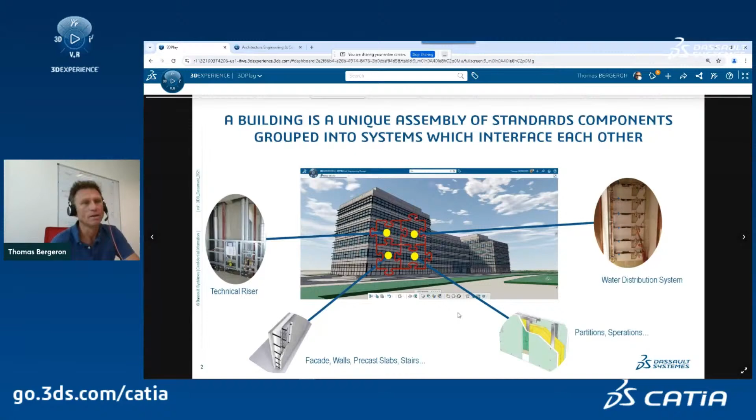If we are able to capture the engineering and the construction know-how on how to fabricate these pieces into a smart component, a brick, then the reuse will be very easy from project to project, okay? So with productization, we target the construction site, okay? In order to capture the construction methods for each brick, we want to capture the knowledge and know-how of each brick, how it is fabricated.

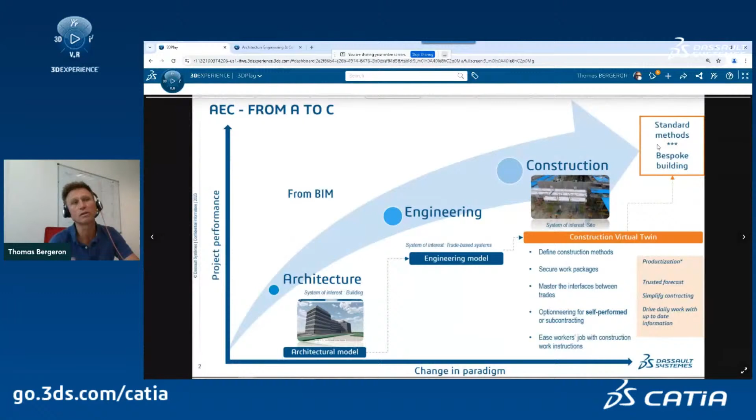We want to master the interfaces on the construction site and to ease the worker's job on the construction site, okay? So productization is about how to standardize the methods of creating all these bricks. So the goal here, if I just play this little video, is to bring to the construction site all the knowledgeable information to fabricate the building. So all these bricks will provide knowledgeable information such as bill of material, quantities, resources needed for each phase of the construction site. So each brick needs to be very detailed, because this is the detailing that will help us to solve all the issues, all the interfaces between these bricks.

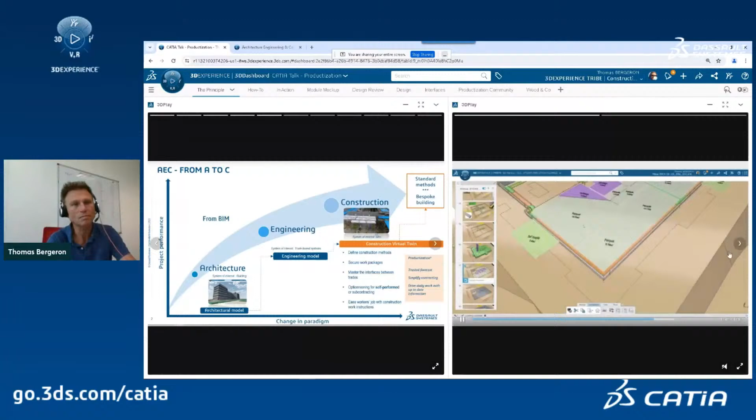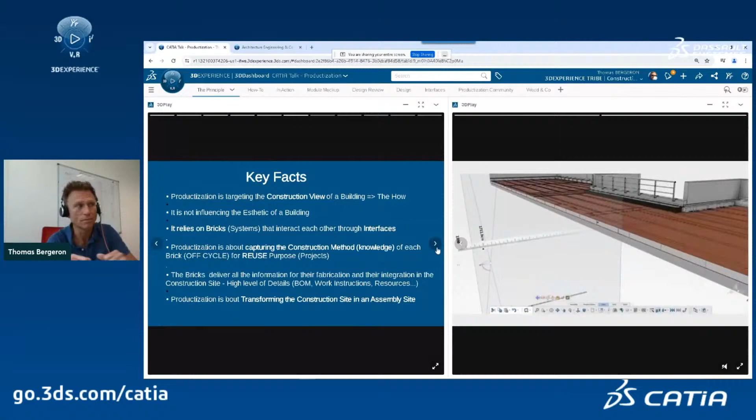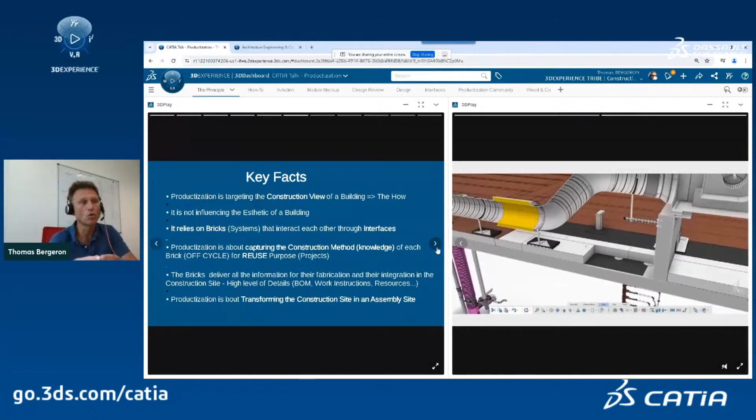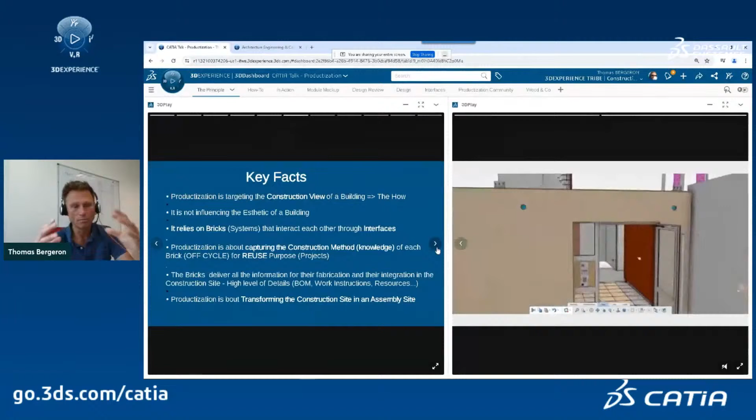So just to quickly summarize these key facts. Productization is targeting the construction view of a building, the how. It is not influencing the aesthetic of a building. It relies on bricks that interact with each other through interfaces. Productization is about capturing the construction methods of each brick. So each brick will be fabricated off-site. We will capture all the knowledge, engineering knowledge, construction site know-how, put that in a brick, and then we'll reuse it from project to project.

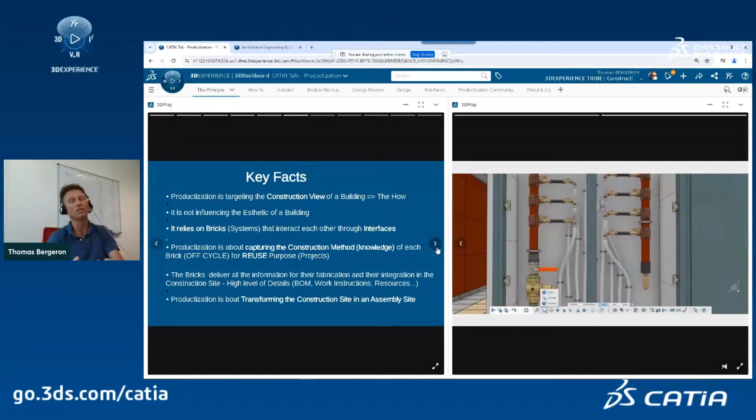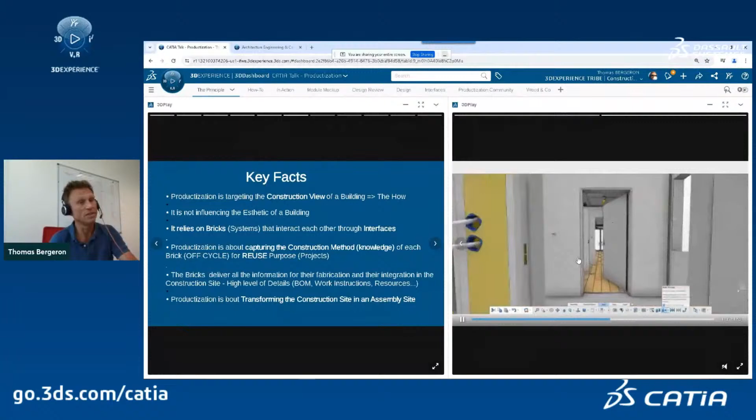So the bricks will deliver all the information for their fabrication, installation and integration on the construction site. That's why these bricks have a very high level of detail. Okay, so they will provide deliverables such as BOM, work instructions, resources. And this is what you see here on this video. This is the level of detail that these bricks will provide to the construction site manager, because all the needed information is in the details.

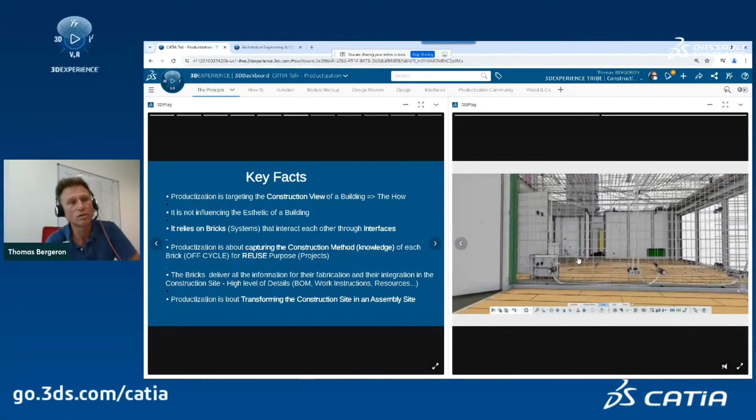How you will integrate and facilitate the interfaces between an electrical plug here inside a concrete wall. These are all the detailed interfaces that we need to solve before the construction site. And that's why the bricks need to be very detailed, in order to manage all these interfaces. Okay.

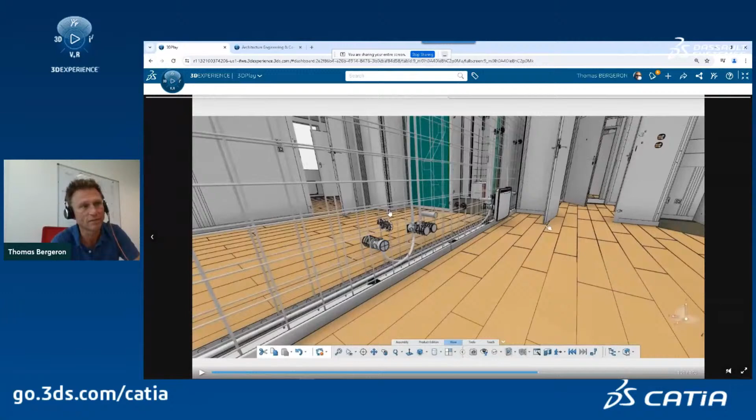So let's continue. So how does it work? Basically, we have an off cycle team that will produce these bricks, which contain the complete know-how. And then once we have a project, this brick will be instantiated inside the project in the construction virtual twin. Because these bricks are adaptive, generative, and parametric, they will automatically adapt to the context of the project. We will solve the interfaces of the brick, and then it will deliver the right information for the construction site manager, such as the BOM, the parts list, the work instructions, in order to facilitate the worker's job. Okay.

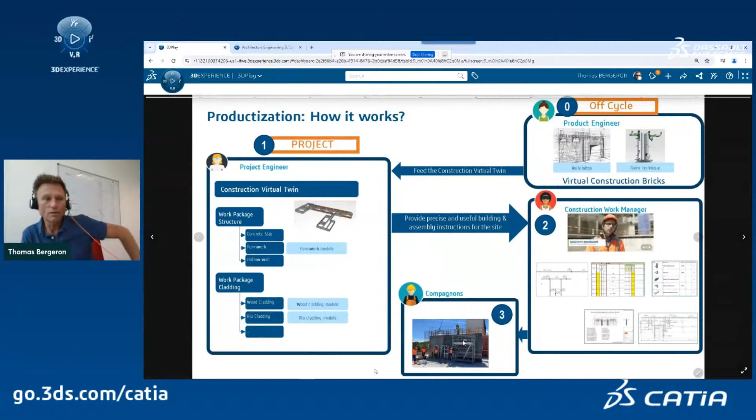So what's inside a brick? A brick has some inputs. The first input will be the geometrical context: where we're going to use this brick, in which context. Then it will have to connect to external interfaces to adapt itself to its environment, and also some technical specifications, because a brick is parametric. You might change the configuration of the brick. It needs to be adaptive to adapt to its context, and sometimes generative when the topology of the context changes from one project to another. So the bricks might need to be generative in order to create new parts on the fly.

And inside this brick, there is a lot of know-how. The field know-how means all the fabrication best practices, the material and human resources needed to install these bricks, and also all the engineering rules, legislation, regulations, standards, and stuff like that. And because a brick is very detailed, it also has to collect all the commercial products from the catalogs and import this data into the bricks, because a brick is mainly composed of standard components.

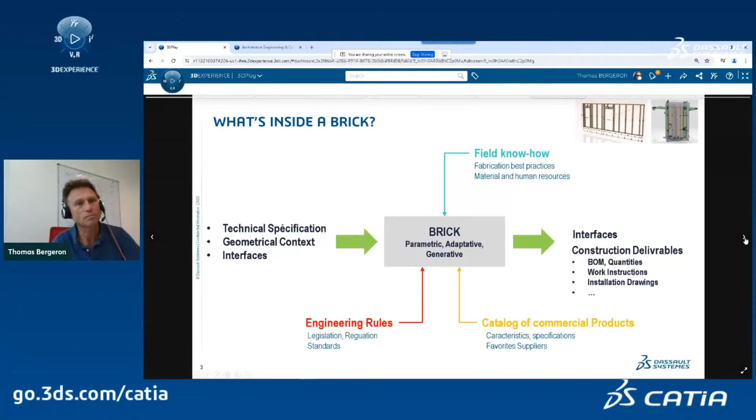So if we take an example of a wood facade, this is an exercise that I've done with one of our pioneers, Wood & Co. So we created a wood facade brick. The wood facade brick here is using a wall coming from a Revit or an IFC file. So here we have a generic wall, okay? This is just a solid, dumb solid.

And what the brick will do, inside the brick, we have a generative skeleton. It will automatically analyze the shape of the input of the wall, automatically detect all the interfaces for windows or doors, automatically, based on field know-how and engineering rules, compute the position of all the standard parts inside the brick, position the standard parts accordingly, and transform, it means cut, drill, or make other operations on the standard parts to create the final results.

So this brick is capturing, of course, the transformable parts, such as the pieces of wood that have specific standards for the sections, but they are transformable because inside the brick, we're going to automatically cut them or drill them at the right size. And also, we're going to use not transformable standard parts that will be just inserted in the brick and positioned automatically at the right location.

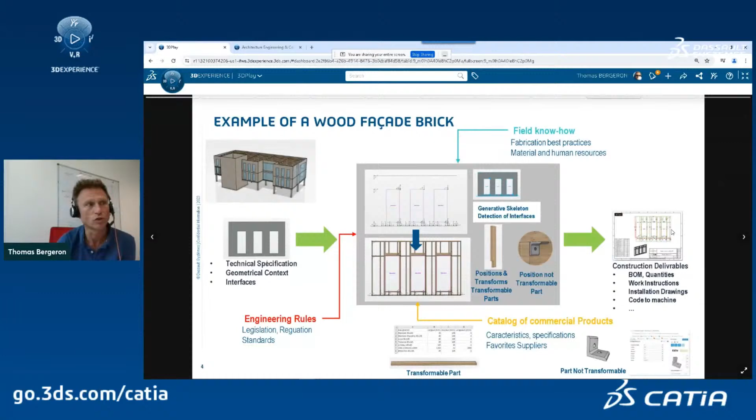And the brick will deliver a BOM, cut list, an installation drawing, and some work instructions. So this is an example of the brick. So let's see that now in action. So here we have a context. Here we have imported into the platform an IFC file. And what we have isolated, okay, all the facade walls. But these facade walls need to be performed as a wood facade.

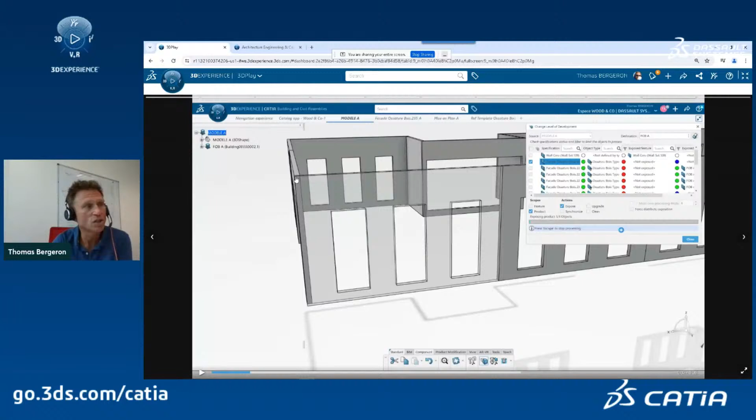And what we are doing here, we have attached the construction method, it means the wood facade, to each piece of facade coming from the IFC. So here, the facade that you see in transparent, we have attached the wood facade brick. And we are automatically instantiating this brick. And let's see the different actions that happen during the instantiation. First of all, the system imports the brick into the context. So you see here, the brick is not positioned.

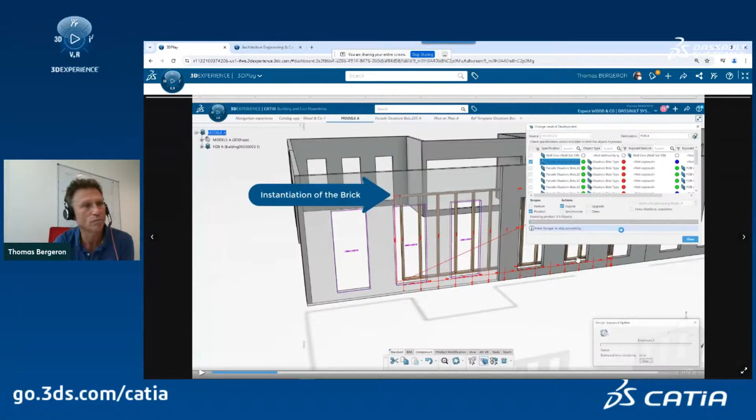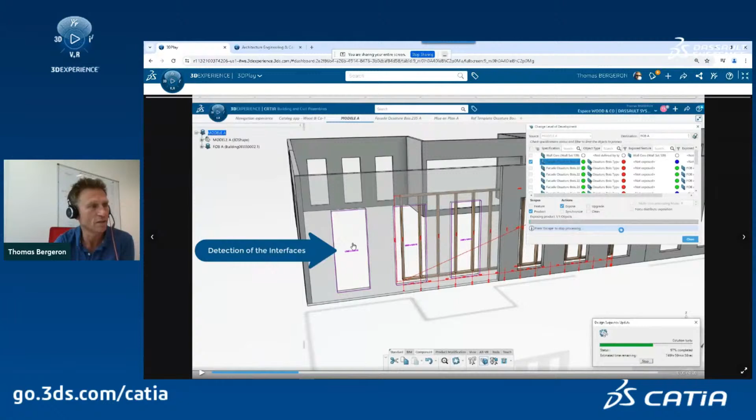Then you see automatically the brick has detected the interfaces of the wall on which we want to create this stud facade. You see the purple curves here, contour. It has detected the windows automatically with the size. Based on that, the brick is analyzing the wall. It has computed the position of each of the members and instantiated each member and cut it at the right dimension. But it has not yet solved the interface with the windows.

And here you see it has started to provide the right solution for a specific opening. For a window, we have some specific trim to instantiate. And the brick is doing that automatically in a generative way. For each window, it will instantiate the right solution. The brick detects the interface. And because we put some knowledge, it knows how to solve this interface.

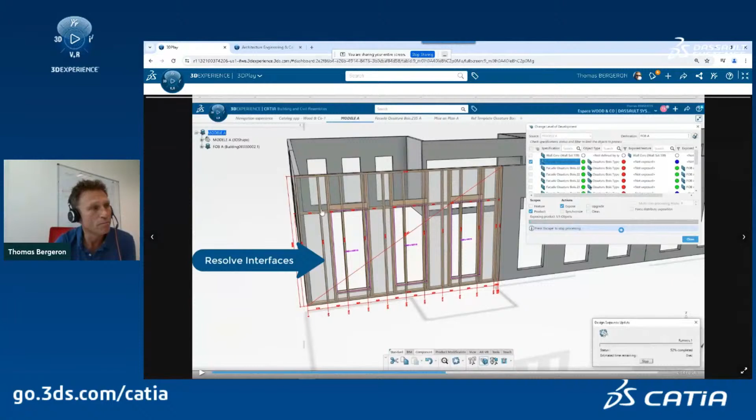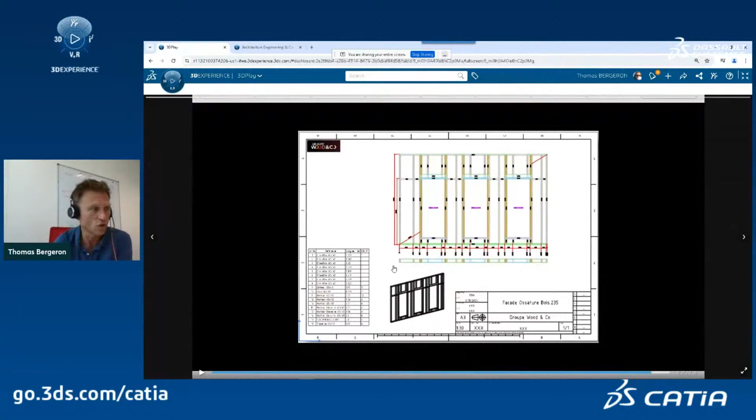So now it has solved the interface, and now the brick will transform all the pieces to create the final result. And you see here we have some studs in the middle of the openings. Of course, we don't want that. So this is where the brick will finally transform and generate the deliverables. And you see automatically it will provide the right result, at the same time with all the quotation and the fabrication drawing here with the parts list and so on. So this is just an illustration of the instantiation of a system inside a building.

So productization reduces significantly the engineering work on a new project. We have captured the engineering work one time, and then we can just reuse it project to project. It minimizes the interfaces at the construction site. Because the bricks have already solved the interfaces inside them, we just have few interfaces at the construction site.

When the brick is delivered at the construction site, it can be delivered in different ways, as kits of parts, pre-assembled, prefabricated. And in fact, what we see is the construction site becomes an assembly site where the kits of parts or the prefabricated modules arrive, and we're going to assemble them together. So this is an assembly job. It's no more a traditional construction job. So it facilitates significantly the worker's job on site. So it reduces a lot the construction phase and then reduces significantly the cost of a project.

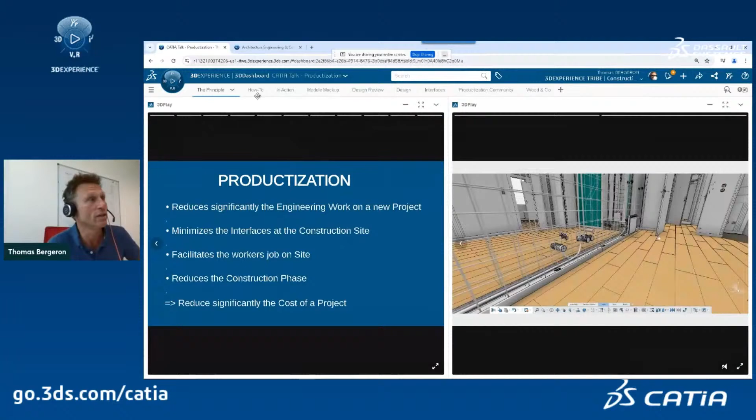So now let's go a little bit more into the technical, in the how-to. So we have seen that inside a brick, we might have a generative skeleton. So what do we use to create this generative skeleton? So here we have, for the wood facade, you see, we have the input. And in fact, we create a design sequence. So this is X generative design or visual scripting.

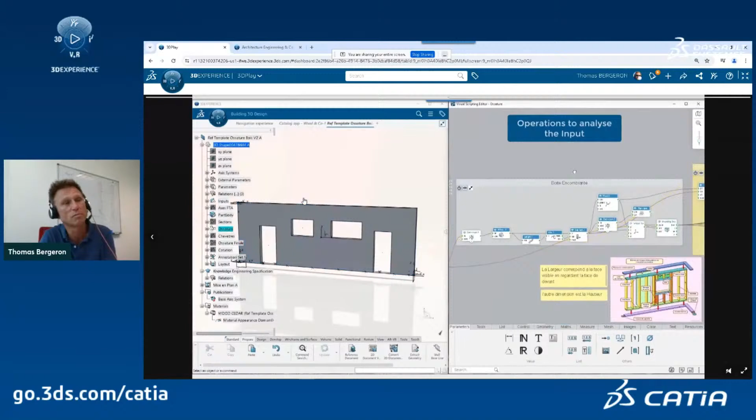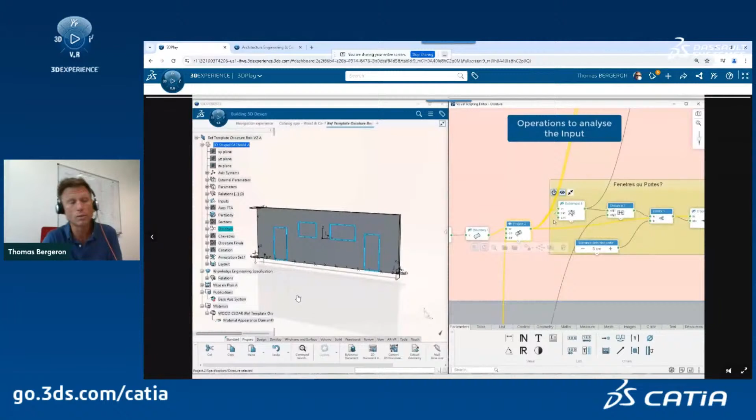This is the solution that we have in the 3D experience platform to automatically recognize the complete topology of an input. So here we have the wall. Automatically, we're able to identify its position, its orientation, to identify the different openings. And then it's very easy to differentiate here the openings, the doors from the windows, because the interfaces might be different. The solution that we want to instantiate on a door or on a window might be different. So this is why we are differentiating the window with the doors to provide the different solution.

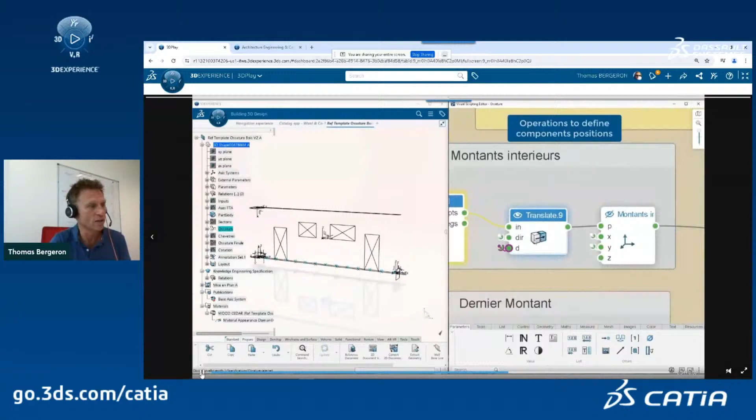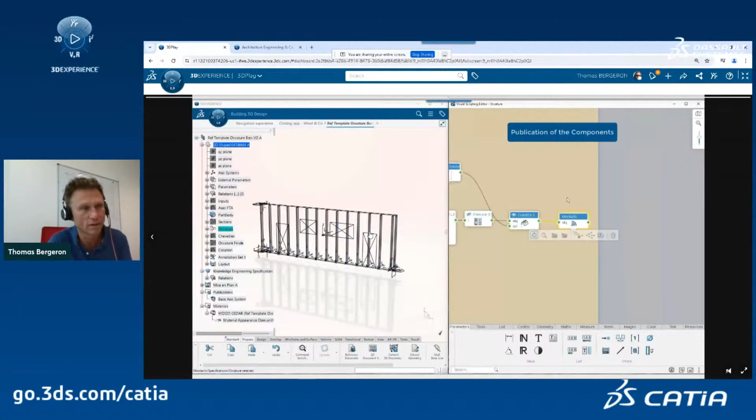In this generative skeleton also, we compute automatically the position of all the different standard parts. And so after, it's very easy to import the part and put it in position. So all this is done in a generative manner. It means whatever the wall, the input is, the topology and the input, we will recompute everything automatically. This is the power of the 3D experience platform. So this is a generative skeleton.

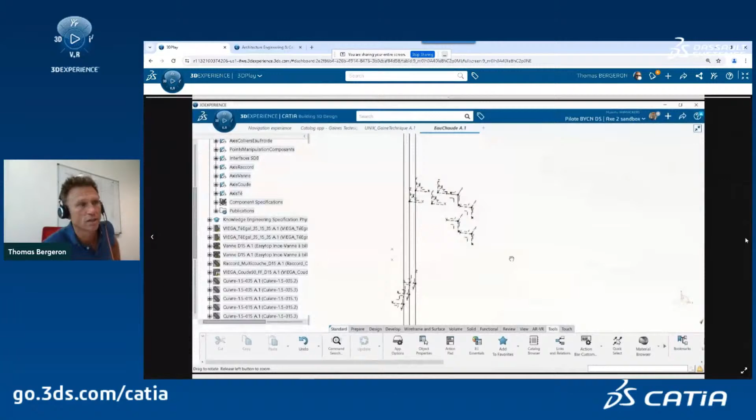We might also use a more standard approach with a parametric skeleton. So a parametric skeleton is just using points, lines, and axis systems to define, in fact, the position of the standard parts of a brick. We would use a parametric skeleton where the input and the context of the brick is very constant from a project to another one, where just dimensions change, but not the topology.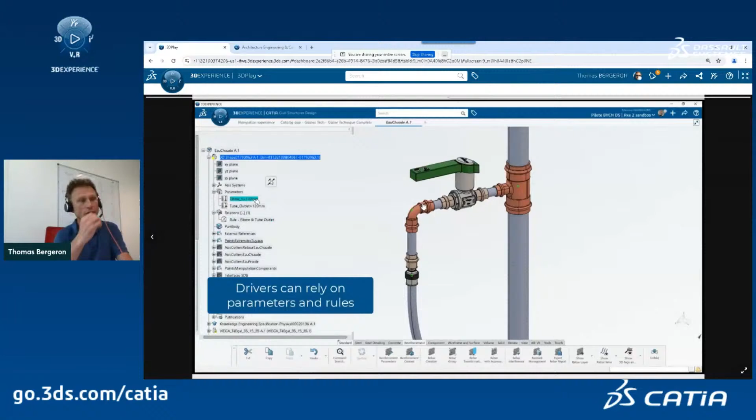So here we see that we create a parametric brick. Everything is associative. It's very detailed, of course. We have all the components, and of course, we can embed know-how rules into the brick to provide a specific behavior based on engineering standards and stuff like that. Okay. Here we go.

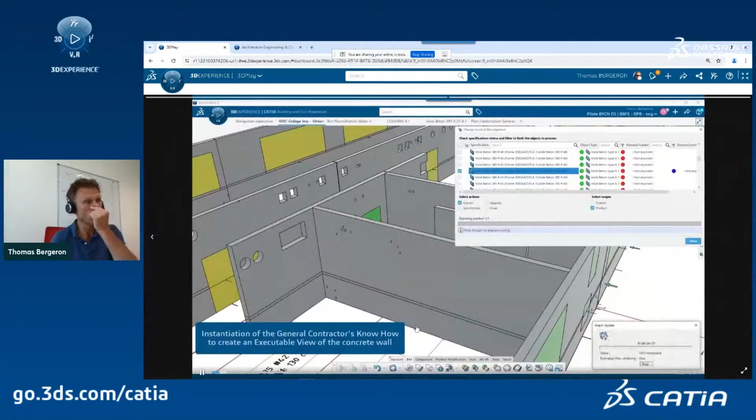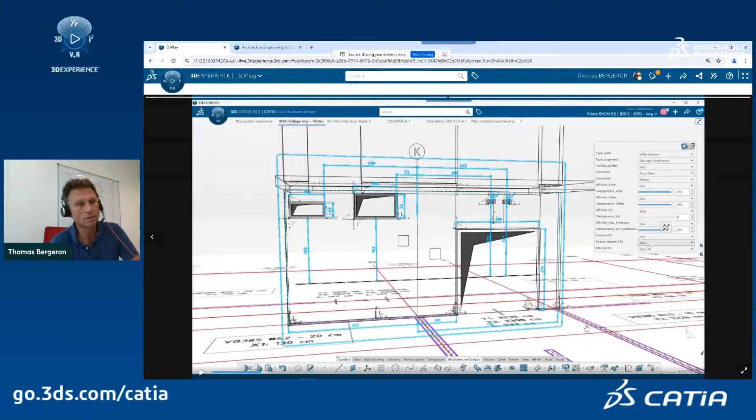Another solution, this is the generative part placement. Generative part placement, this is very powerful. So this is a concrete wall brick that we are using on an IFC file. So automatically it detects all the openings of the wall. The brick will dimension automatically all the openings to create the formwork drawing automatically.

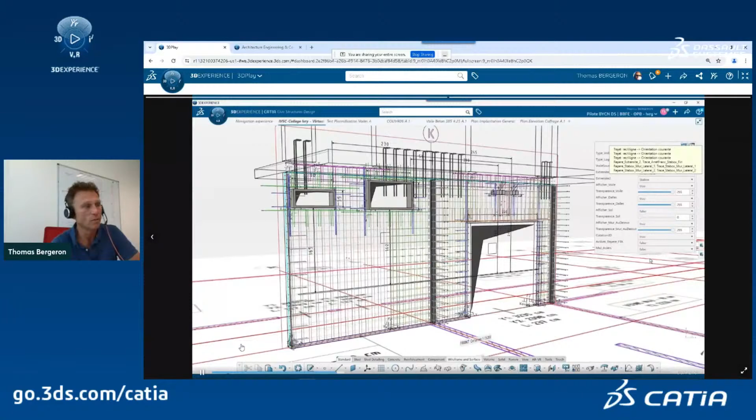And at the same time, because in the brick we have captured a lot of knowledge, we are able automatically to position standard modules of rebars at the right position, location, and dimension. And this in a generative manner. So this is extremely powerful because here with one single brick, you can in fact create the rebars of hundreds of walls.

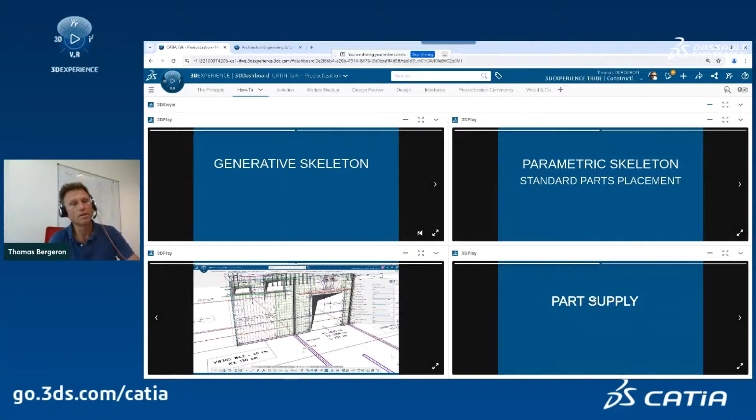Okay. The other topic that I would like to discuss and to present you is part supply. This is the capability when you fabricate a brick to be able to directly access a supplier catalog to select very specific parts from the supplier catalog and insert this part directly into your design. So here, we're gonna select a connection angle with 2 holes.

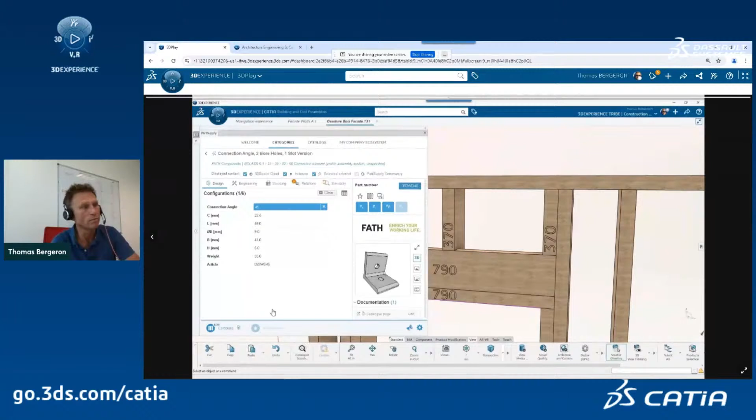So directly from part supply, we are able to change the configuration, to select a standard configuration that we want, to review the technical specification of this connection and import it directly in our session. So automatically the part is converted, inserted into our design. And if we re-import it a second time, we will use the same reference.

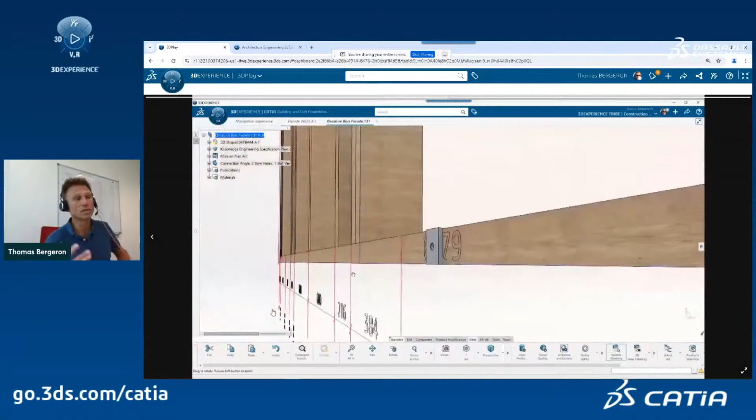So then we can, of course, quickly reuse this part into the design, position it exactly where we want. And so it facilitates significantly, in fact, the work of the designer to be able to directly access the supplier components. Okay.

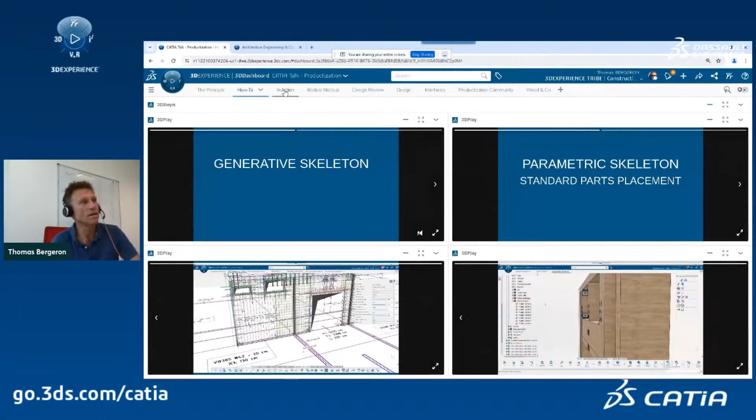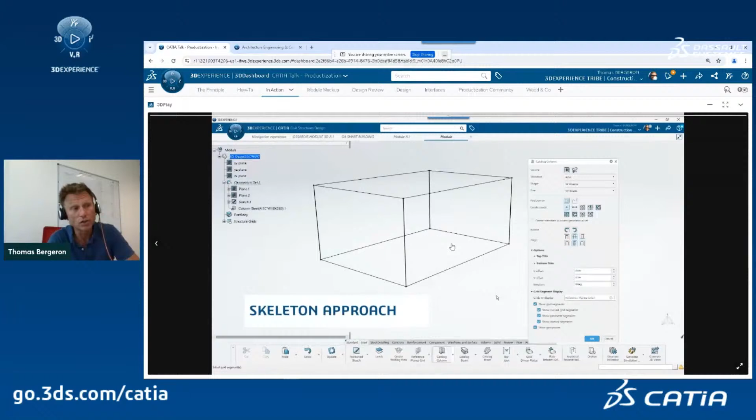So let's see productization in action. So you have seen some of it, and now I'm going to review and comment a video that I posted recently on the different media. It's about creating a building module using productization. So actually, the goal here was to illustrate to our customer the productization approach.

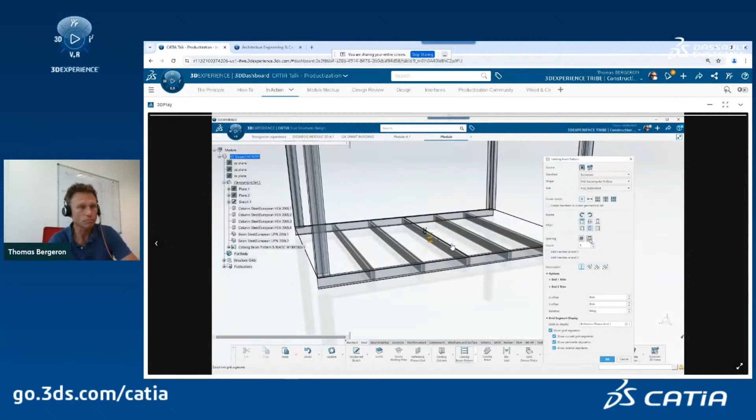So here what we have is a module. And here we have created a skeleton, a parametric skeleton to define, in fact, the bounding box of the module. And right on this module here, I am building some steel connections to create the steel structure of the module.

But what's interesting, it's a little bit after, it's the way we're going to use, in fact, several bricks to fabricate this module. What's interesting in this video is the bricks that I've used. None of them were dedicated to this project. It's just reuse of bricks in a totally new environment.

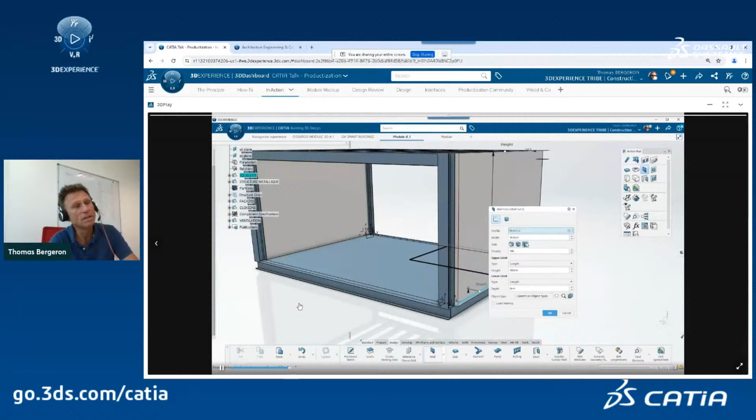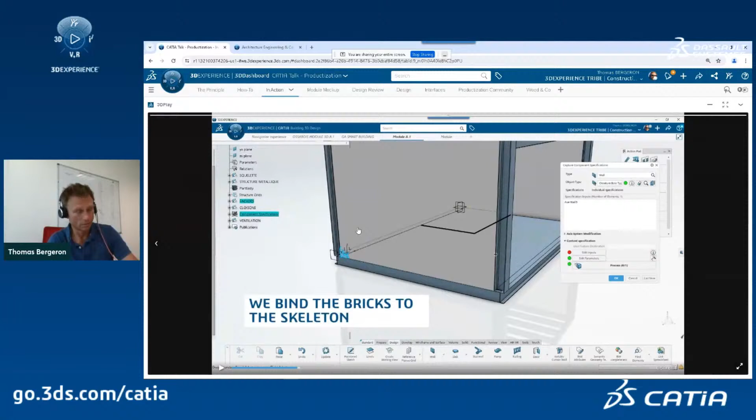So here what I'm doing, I am illustrating the architect's view, creating some very basic wall, okay? But on this basic wall, I attached a specification. This is an object type. And what it means, in fact, to this basic wall from the architect definition, we are attaching a construction method. It means a brick. This basic wall will be a wood facade. So just by attaching a specification, a construction method to this wall, I will be able to create automatically my wood facade.

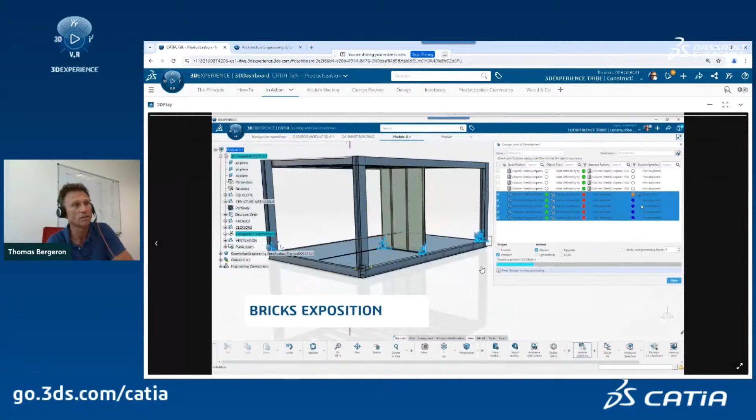So we're doing that with these two walls. At the same time, we are attaching other specifications for the partition. So here you see the small icon. So here we have defined also, say, on this line, I want a partition, and a partition. And automatically the system will search in the brick catalog and instantiate the bricks. Automatically, they will adapt to their context. So you see they are imported and automatically their sizes adapt to the right context, to the right position with the right engineering rules. So it's very fast, very powerful.

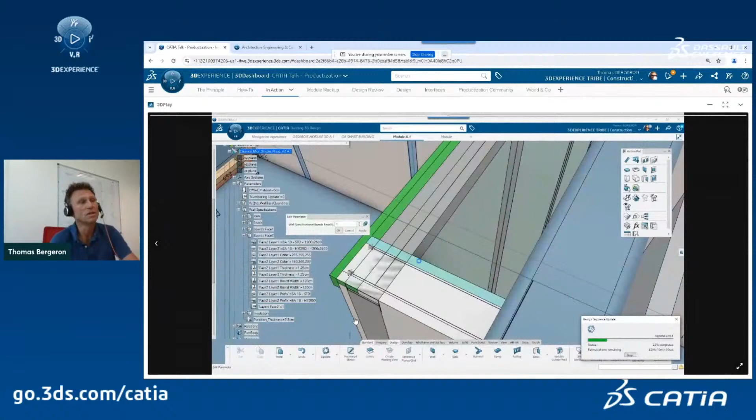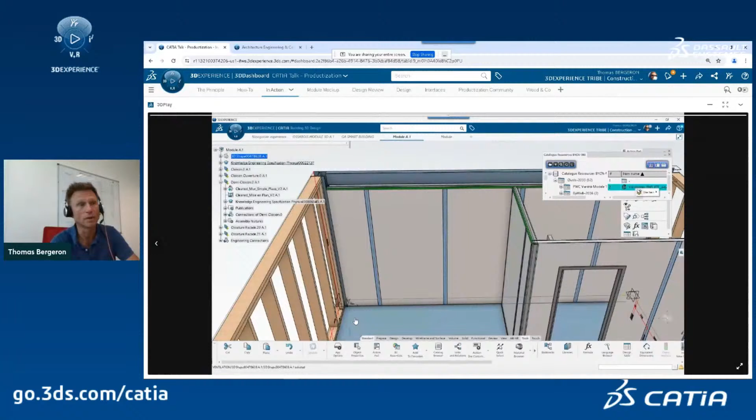And here we know that each of these elements are fully fabricable, okay? Of course, each brick has some configuration parameters that are open to the user to change the configuration. And each brick delivers the fabrication assembly, with all the parts list in order to be fabricated on site or in a factory. Here, what's interesting, I want to instantiate a ventilation brick.

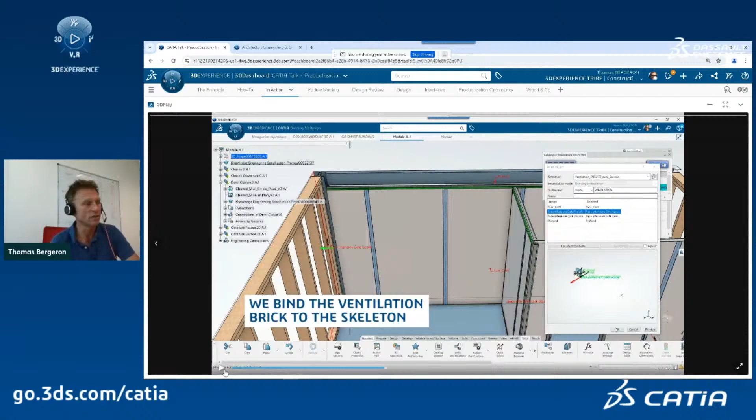And you see this ventilation brick has some inputs to adapt to its context. And here, automatically, the system has detected all the inputs needed to instantiate this brick. Thanks to the naming convention on interfaces, automatically it detects where it has to position this ventilation brick. So automatically it's positioned correctly, against the wall between the bathroom wall and the facade. And now the user can, through parameters, just adapt its position.

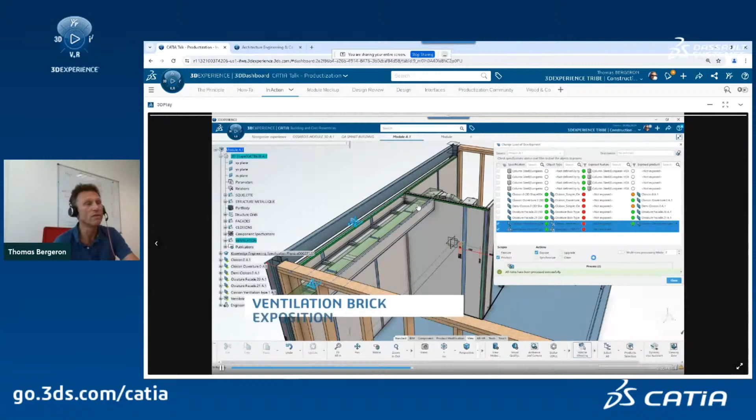Of course, this is a detail brick, and here we're instantiating all the detailing of this ventilation with all the different components you see of the ventilation system, the fixation, the duct, the elbow, and so on. And of course, this is fully parametric. So here you see zero engineering study. You just have to pick a brick from a catalog and instantiate it.

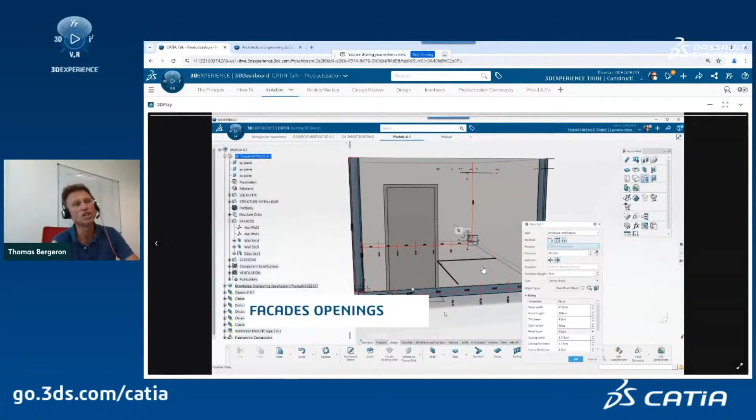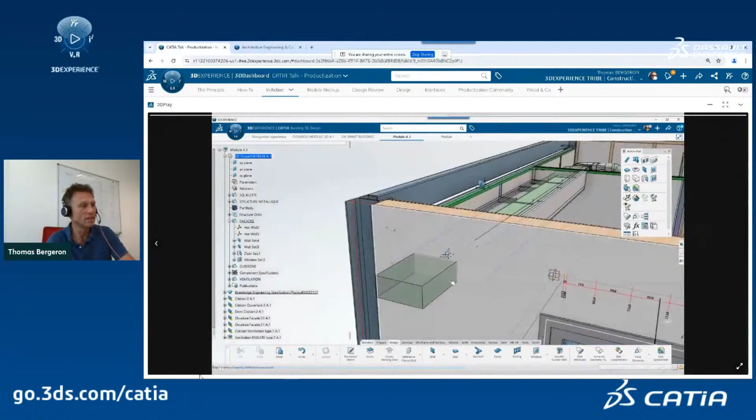What we're doing here, we're changing the architect's intent. We are adding a door into the architect's wall. So this is the architect view. In the background behind, you see the facade, which is the construction view. So here, what we are doing very quickly, we are modifying the architect's definition by adding a door or a window. At the same time, in this wall, we see that the ventilation brick here is publishing an interface. And we're going to use this interface to create the opening inside the wall.

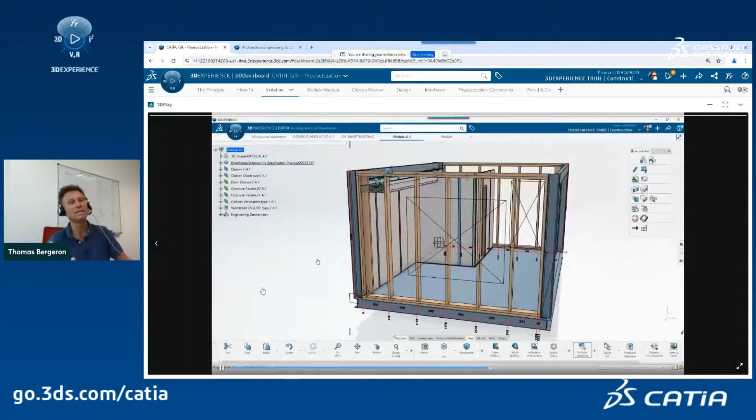So this is the architect definition. And now the goal is to propagate automatically this modification into the construction view. And you see here that the brick has detected the opening. You see here the black contour with the cross here also. So automatically, the brick has detected the interfaces for the window or for the ventilation and will provide automatically the solution for these two interfaces.

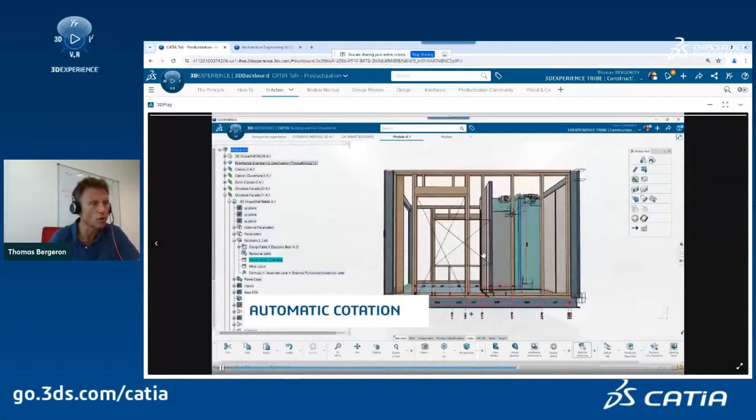So this is very powerful because here you don't have to do a new engineering study again. Automatically, you pick the right solution. And you see automatically the dimensions have been recomputed. So you don't have to retouch the drawing. All the dimensions will be updated automatically.

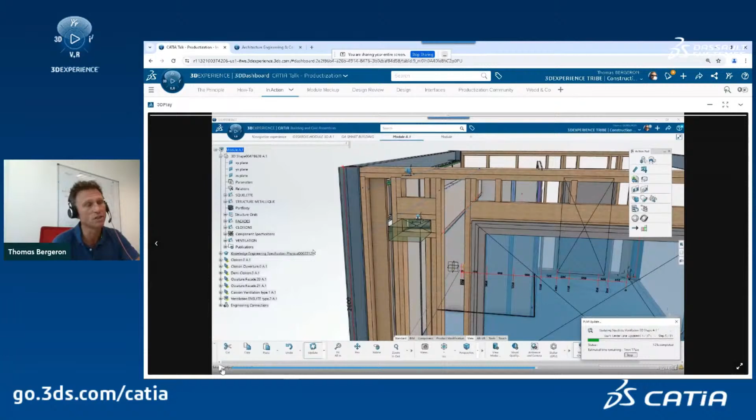So here we see the connection between a ventilation brick and the facade. This is exactly the puzzle with the two bricks interfacing each other. I modify the position of my ventilation, and automatically my facade is updating and following this modification. Okay, so let's stop with this one.

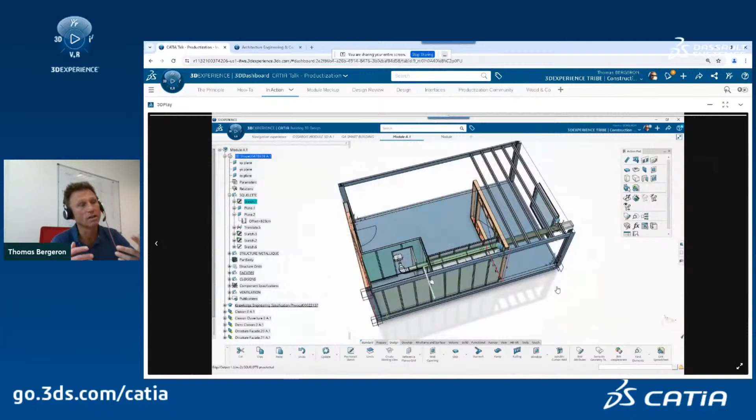And of course, just to finish it, this is fully parametric. So if I change the size of the module. So here we extend, we create a much bigger module here. Automatically, everything will follow. Because these bricks are generative, it will compute new studs for the partition, for the facade, and everything will update. All the bill of materials will update automatically.

Okay, so this is the power here. It's the adaptability of the bricks to a new context, to be able to recompute themselves and to still manage the interfaces between each other.